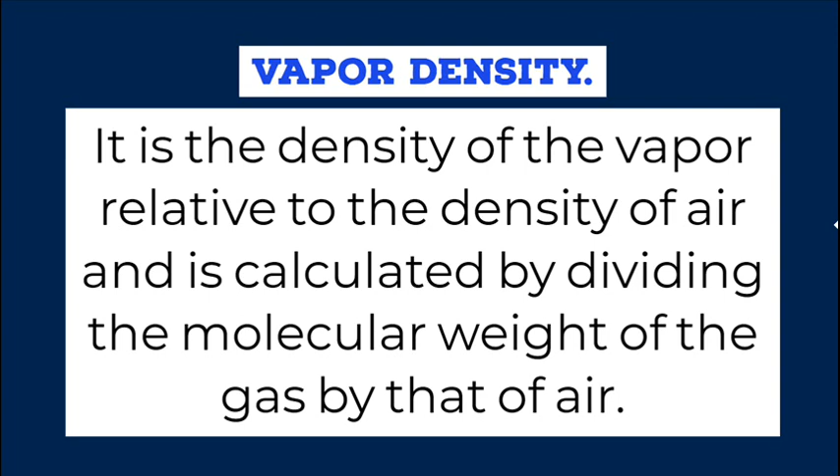Criminology Board Exam Reviewer. Fire Technology and Investigation. Definition of terms. Part 1. Vapor density. It is the density of the vapor relative to the density of air and is calculated by dividing the molecular weight of the gas by that of air.

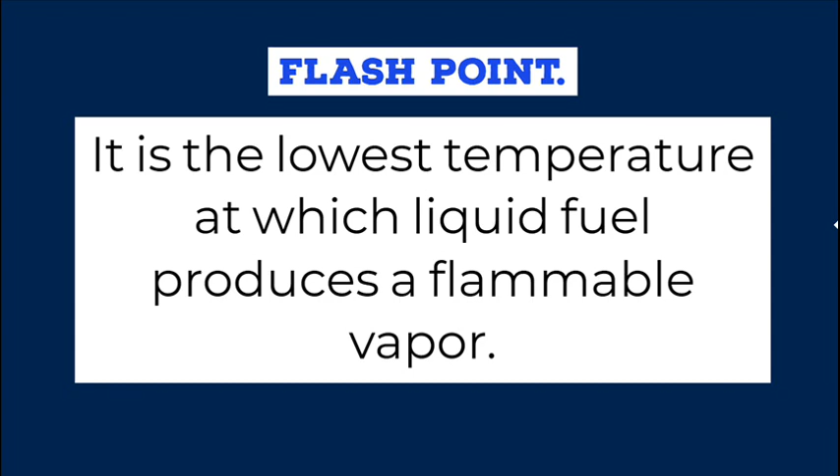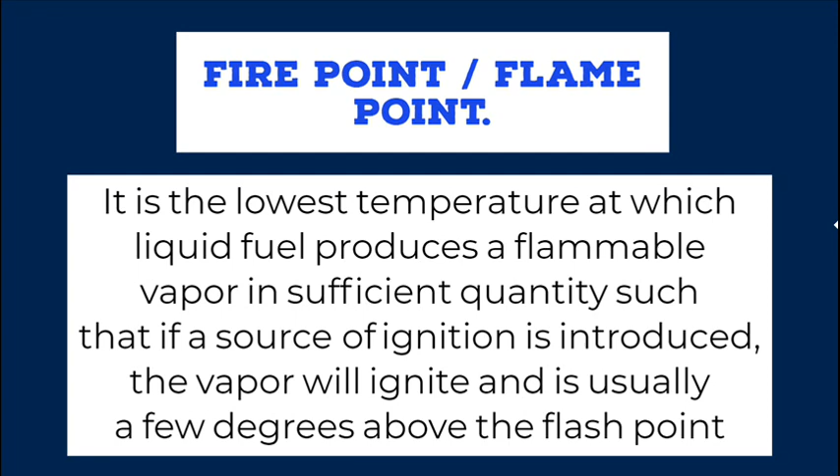Flash point. It is the lowest temperature at which liquid fuel produces a flammable vapor. Fire point, flame point. It is the lowest temperature at which liquid fuel produces a flammable vapor in sufficient quantity such that if a source of ignition is introduced, the vapor will ignite and is usually a few degrees above the flash point. Ignition, auto-ignition temperature. It is the temperature at which a fuel will ignite on its own without any additional source of ignition.

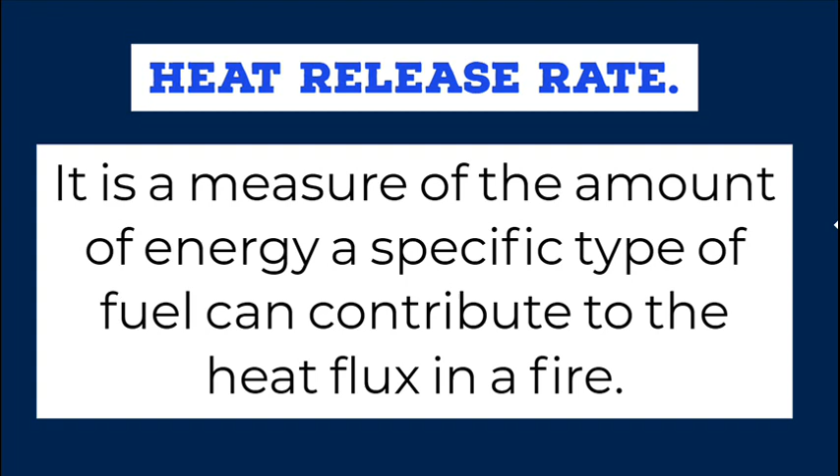Thermal inertia. It is the ease at which a material can be ignited. Heat release rate. It is a measure of the amount of energy a specific type of fuel can contribute to the heat flux in a fire. Heat transfer. It is the mechanism in which fire can spread from its origin to other sources of fuel.

Combustion or burning. It is the sequence of exothermic chemical reaction between fuel and an oxidant accompanied by the production of heat and conversion of chemical species. The result of the heat can result in the form of either glowing or flame. Glowing combustion. It occurs when solid fuels are not capable of producing sufficient quantities of gas during pyrolysis to sustain a flame. If access to the oxidant, air, is limited, glowing combustion may result.

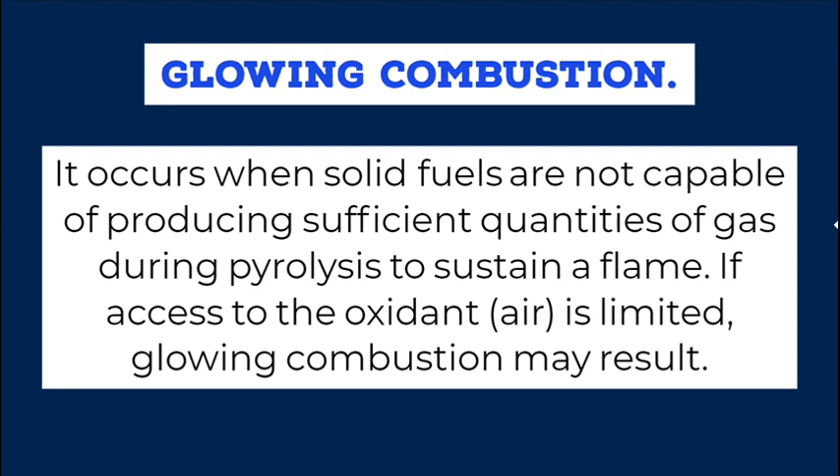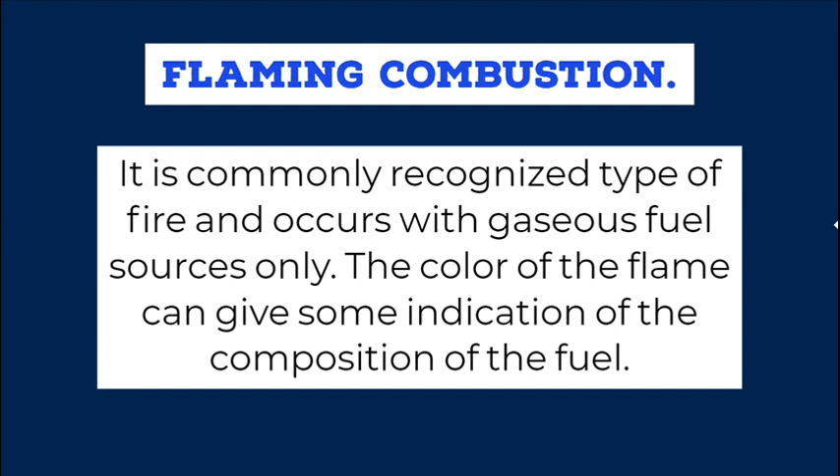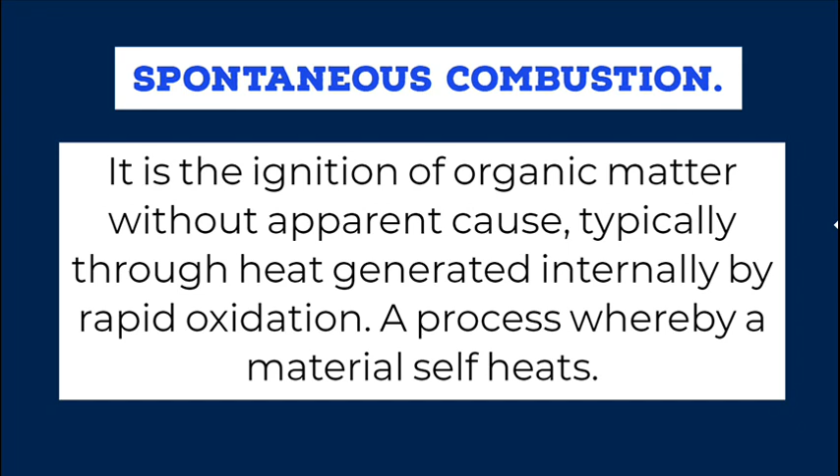Flaming combustion. It is the commonly recognized type of fire and occurs with gaseous fuel sources only. The color of the flame can give some indication of the composition of the fuel. Spontaneous combustion. It is the ignition of organic matter without apparent cause, typically through heat generated internally by rapid oxidation. A process whereby a material self-heats. Explosive combustion. It can occur when vapors, dusts or gases, premixed with appropriate amount of air are ignited.

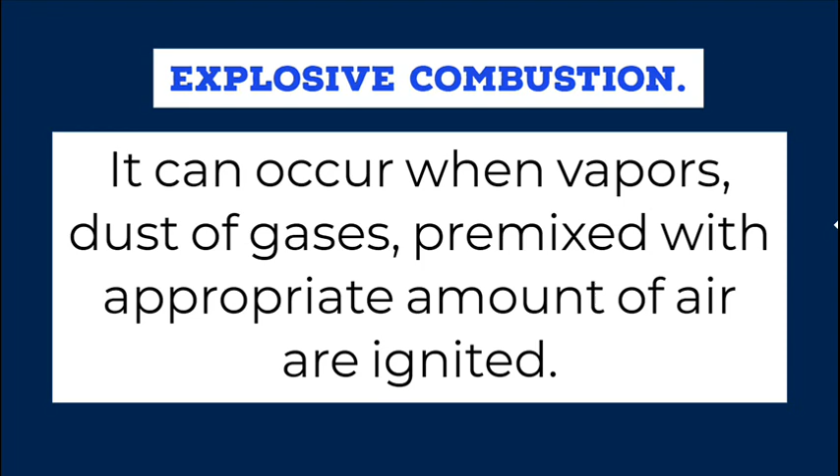Arson. It is the intentional or malicious destruction of property by fire. Fire analysis. It is the process of determining the origin, cause and responsibility as well as the failure analysis of fire or explosion. Fire cause. It is the circumstances or agencies that bring a fuel and an ignition source together with proper air or oxygen. Fire spread. It is the movement of fire from one place to another.

Flash fire. It is a fire that spreads with extreme rapidity such as the one that races over dust, over the surface of flammable liquids or through gases. Fuel load. It is the total quantity of combustible contents of the building, spaces or fire area, including interior finish and trim expressed in heat units or the equivalent weight in wood. Point of origin. It is the exact physical location where a heat source and fuel come in contact with each other and a fire begins.

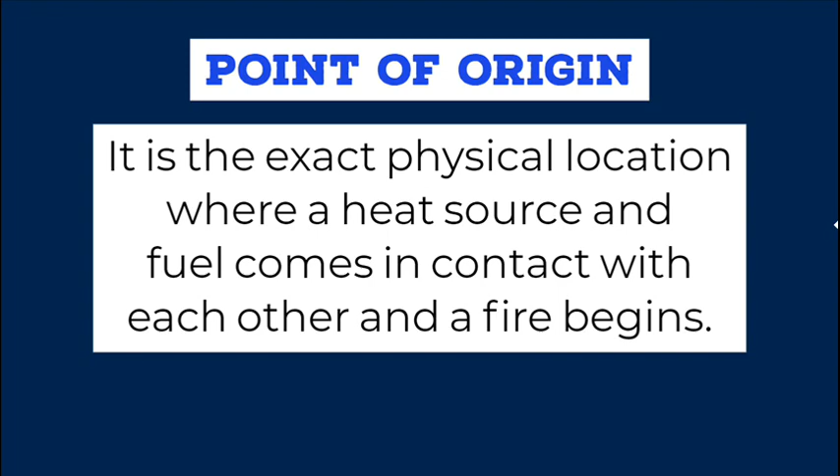Rekindle. It is a return to flaming combustion after incomplete extinguishment of a fire, reigniting at some time after being put out. Spalling. It is the chipping or pitting of concrete or masonry surfaces. Abatement. Any act that would remove or neutralize fire hazard. Administrator. Any person who acts as agent of the owner and manages the use of a building for him. Blasting agent. Any material or mixture consisting of a fuel and oxidizer used to set off explosives.

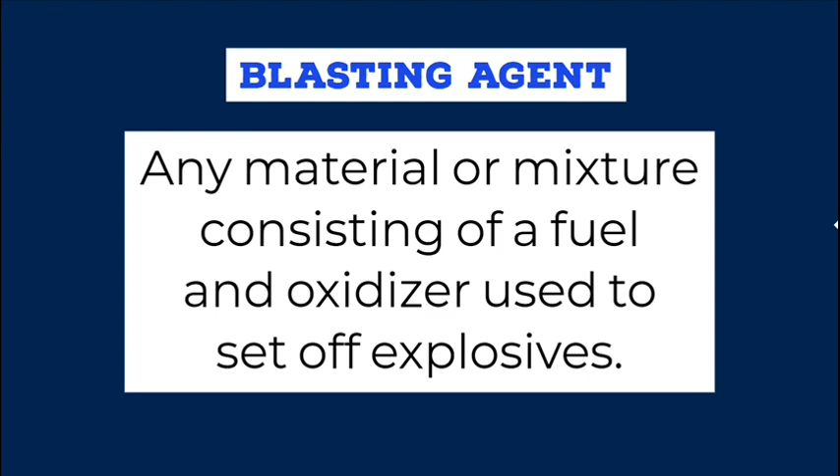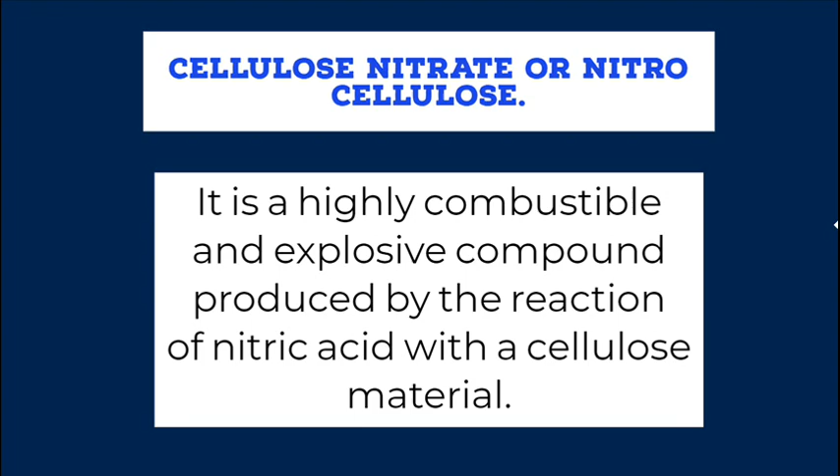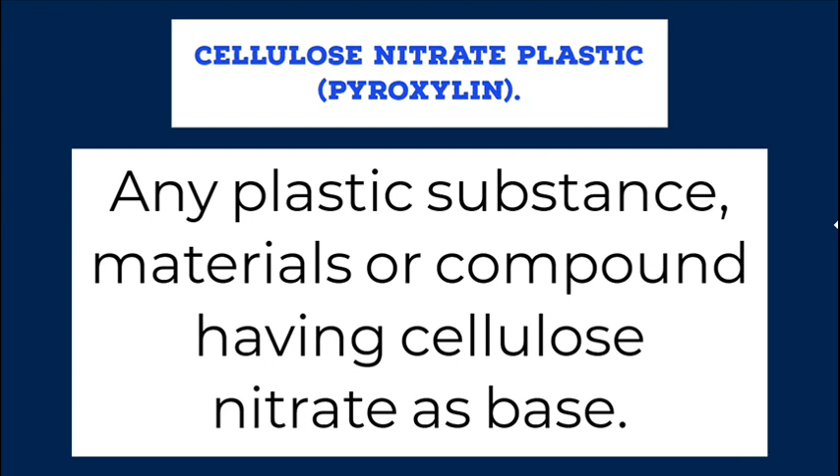Cellulose nitrate or nitrocellulose. It is a highly combustible and explosive compound produced by the reaction of nitric acid with a cellulose material. Cellulose nitrate plastic, pyroxylin. Any plastic substance, materials or compound having cellulose nitrate as base. Combustible, flammable or inflammable. Descriptive of materials that are easily set on fire. Combustible fiber. Any readily ignitable and free-burning fiber such as cotton, oakum, rags, waste cloth, waste paper, kapok, hay, straw, Spanish moss, excelsior, and other similar materials commonly used in commerce.

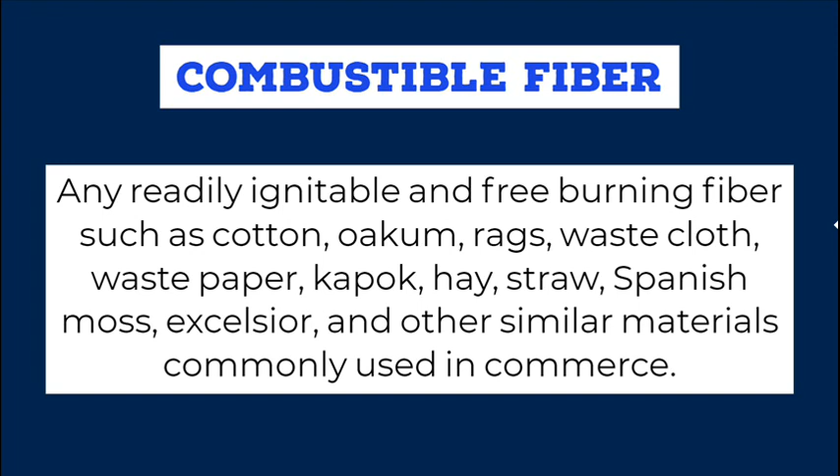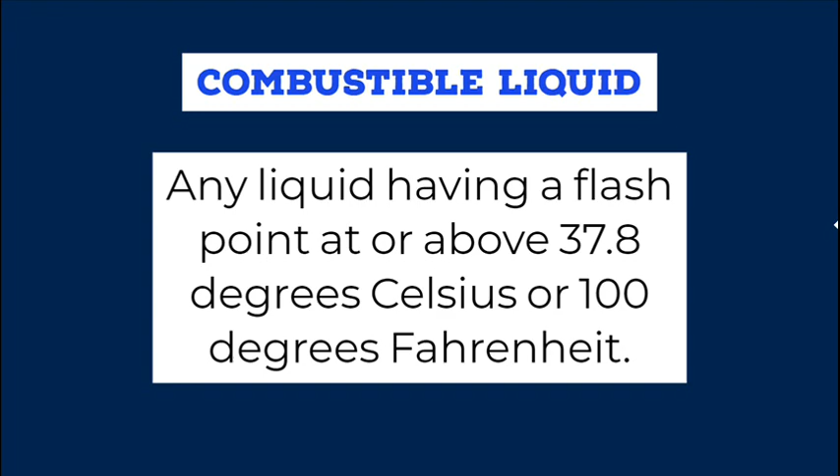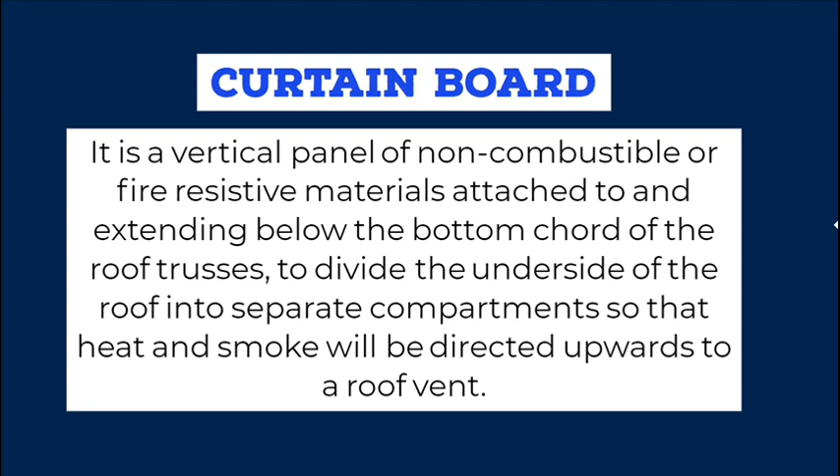Combustible liquid. Any liquid having a flash point at or above 37.8 degrees Celsius or 100 degrees Fahrenheit. Corrosive liquid. Any liquid which causes fire when in contact with organic matter or with certain chemicals. Curtain board. It is a vertical panel of non-combustible or fire-resistive materials attached to and extending below the bottom chord of the roof trusses, to divide the underside of the roof into separate compartments so that heat and smoke will be directed upwards to a roof vent.

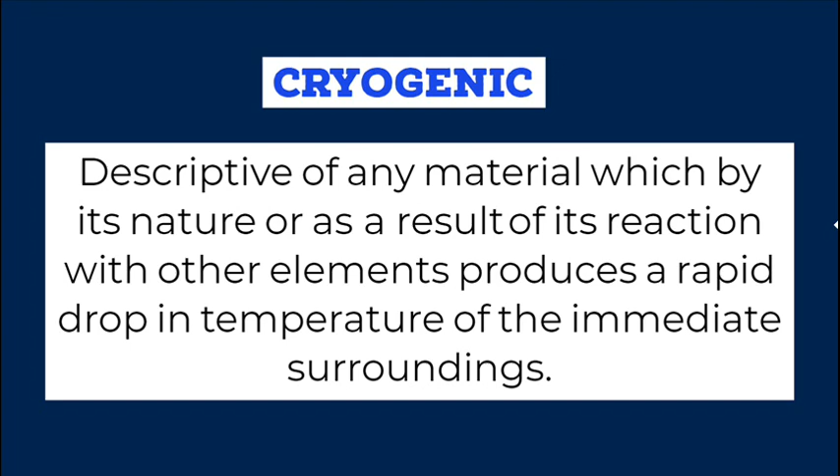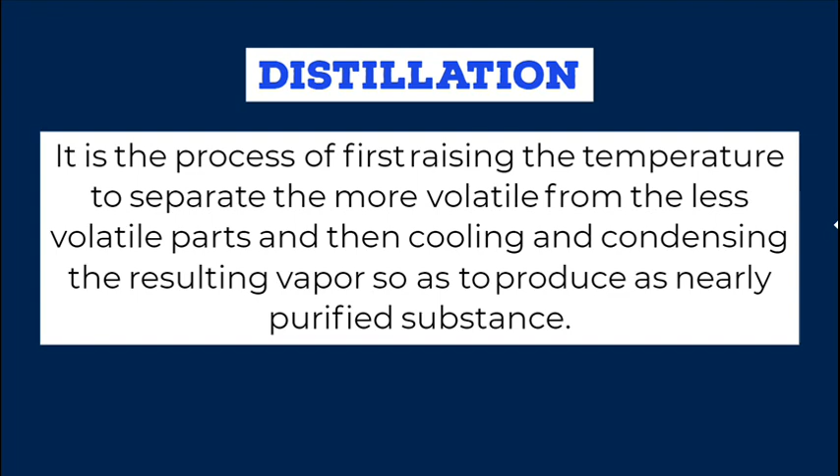Cryogenic. Descriptive of any material which by its nature or as a result of its reaction with other elements produces a rapid drop in temperature of the immediate surroundings. Damper. A normally open device installed inside an air duct system which automatically closes to restrict the passage of smoke or fire. Distillation. It is the process of first raising the temperature to separate the more volatile from the less volatile parts and then cooling and condensing the resulting vapor so as to produce a nearly purified substance.

Duct system. It is a continuous passageway for the transmission of air. Dust. It is a finely powdered substance which when mixed with air in the proper proportion and ignited will cause an explosion. Electrical arc. It is an extremely hot luminous bridge formed by passage of an electric current across a space between two conductors or terminals due to the incandescence of the conducting vapor.